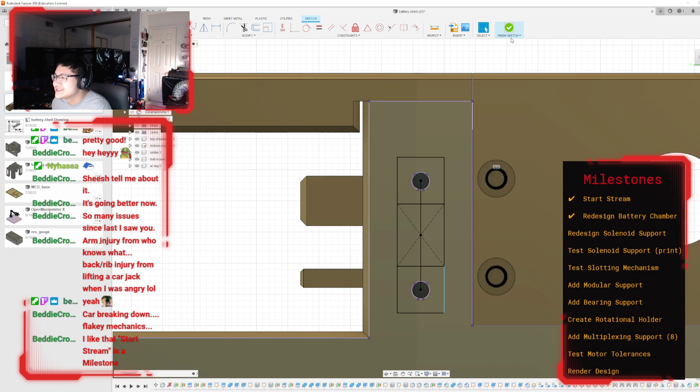I like that Start Stream is a milestone. I also agree. I realistically just have it there so that every time I make one of these charts, I don't have to copy paste the check mark, but it makes my life slightly easier when I complete a task. But yeah, I mean, at this point, I count it as a milestone. That made you feel good about accomplishing something. That too.

So I need to... theoretically, I can finish all this by Friday. That's my goal, anyways. All I have to do is, I made some redesigns to the chamber yesterday, in like around 1 hour, so that this thing is actually printable, because this is really badly CADed. I'm gonna be honest here.

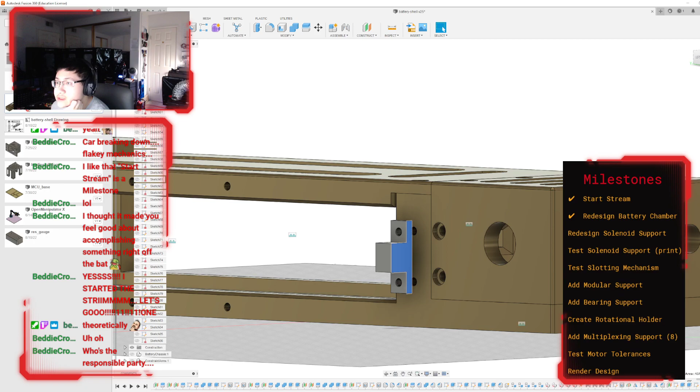And so that was that. This entire thing is due on Friday. So, no pressure there.

Yes, I started the stream. Let's go, that's me internally. Who's the responsible party? No pressure, buddy. No pressure, you got this. Oh, thank you. Thank you, Bella. And thank you, Betty. If you think you can, you can.

I'm still waiting on a bunch of things, actually. I can't deliver the Blinky Loaner kits until my stickers are here. It didn't say which Friday. It's this Friday, it's 3 days from now.

So I'm printing one of these cages off my printer right now on Belty. You'll do the heavy lifting for the most part.

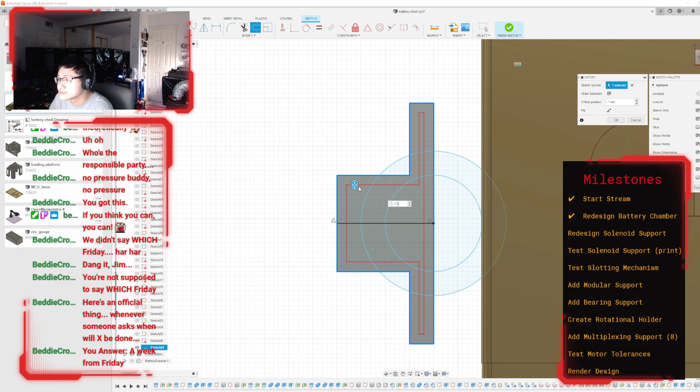This piece is mainly just to... well, let me explain what I'm doing first. So yesterday I went ahead and made this thing printable, which means redesigning the top part. I split the battery chamber into different components, like this top piece here, this bottom piece here, this little slotter piece in the middle. I made holes for it and everything. And also this little back piece was the hardest thing to print ever because of how it was designed. I don't know what happened. I tried to print it twice, and it just destroyed itself in Belty.

Here's the official thing: whenever someone asks when X will be done, you answer a week from Friday. That's official from people with millions of dollars. Seriously, you don't say which Friday though. I have a technical meeting with the people I'm supposed to turn this into, this Friday, so I really hope I have it done this Friday.

Okay, and then so I have this piece, which looks pretty funny. This piece is supposed to be a wire holder for the electronics that are eventually going to come from the other side, because this is supposed to hold a battery either while it's on the ground or if it's in the air. It's got to be slightly versatile.

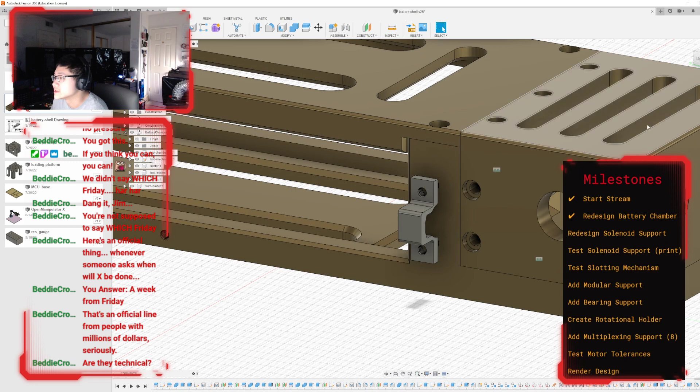So this piece is going to be pretty important. It locks onto the rest of the diagram right here, the rest of the model. That body there, this is going to be—there's 43 bodies already. Wire holder, you put it as a component. Let me just make another component here. Just call this external. Alright, so the wire holders are going to be... my organization in this file is actually kind of okay, considering some of my previous projects in the past.

Is there an easy way to select like the middle of this thing? Shift the key. Control. Control.

There you go. One dedicated wire holder coming right up, and then I just duplicate this on the other side.

Alright, so I'm going to go ahead and rotate this 180 degrees. Bring it all the way out here. Whoa!

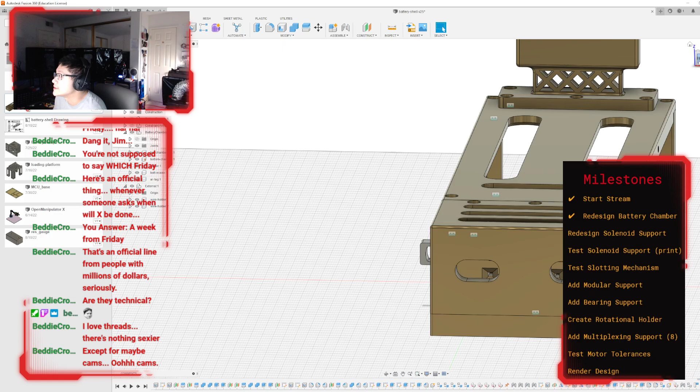Okay, just go ahead and joint it. Control. Oops, joint. Okay.

Alright, that was the easy part. Let me go ahead and get my constraint arms. I'm going to drag it into external as well.

Solenoid arm. Same for this one. I can go ahead and delete this component. Never mind, just put it as underscore.

Okay, so these solenoid arms are going to go in, attach themselves to the battery as well. Okay, now I have to actually make the actual solenoid piece.

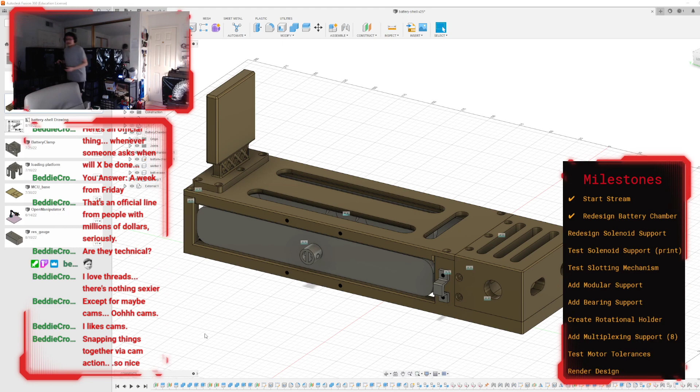So, I printed a bunch of these battery carriages, right? And then I printed this thing, which is really fragile. It's the slotter that's supposed to go at the end of this battery chamber.

So if you take one of these batteries and slot them into, pretend there's a big battery chamber here, and you slot it in like this, it goes all the way in, and it's very flush with the battery chamber. Like look, this is a nice fit. It's very...

Why did you make it so fragile? It's a prototype, Betty. You could probably break off these little nubs here and nubs here if you gave it no...

Nice, this is the wrong part. I'm gonna print this out of resin eventually, so it's not as fragile, but it works.

This is the end of it. This thing has screw holes on all four sides of it. Eventually I'm gonna coat it with Bellum's conductive glue paint thing, and it's going to slide right in.

So now the difficult part is just getting the contacts to work. I think it's to the point where it's a good contact, I just need to test it. But it goes right in, it's a very nice fit.

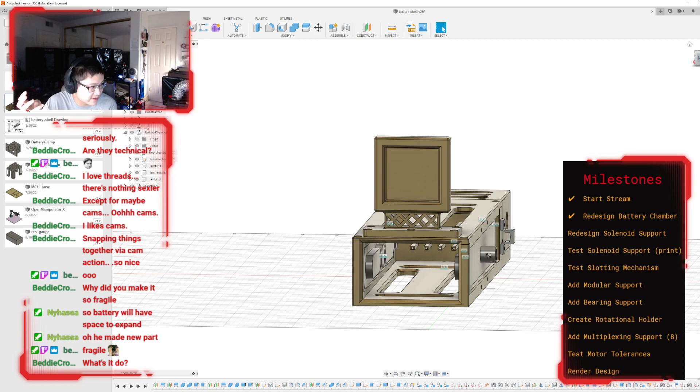And so when it swaps out the batteries, which is my department, what I'm doing, it'll need to be removed from the drone using a robotic arm, and then it needs to be placed in a compartment that can identify its voltage, charge, lifespan, whatever.

And so this is going to be the compartment. The battery will go into here, which the battery is going to be this thing. So the battery slides in, it locks itself into the back part, which is the slotter.

There's a bunch of electronics here that go ahead and map the XT60 and JST connectors with two main power and data lines. And basically these two arms come in here and lock into place, so they lock into the battery's internal parts, preventing it from moving using a solenoid.

And that's what I'm supposed to be designing right now, is the solenoid that clamps into this thing. And then this is supposed to be holding the wire that goes from the solenoid into the electronic compartment that acts as kind of like the control for whether to release or hold the battery in place.

Even better, in-flight hot swap battery exchange. I think one of the teams, at least in Cal Poly, not in my project, but they are trying to attempt to do that. So I think it's pretty interesting to see what they're going to do.

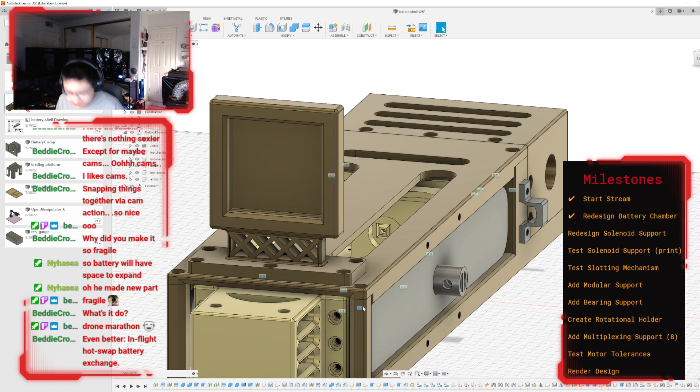Hot swapping power in the air is hard, though. But yeah, that's what my job is, basically.

So, in reality, I've already designed one of these pieces, which is this thing here. Specialized battery drone. Yeah, pretty much.

Make them work like flies mating. Those are some pretty large flies, Beddie.

Back when I made this little part, I measured how long this was supposed to be. Apparently 45 millimeters, and I'm not sure if this is too far in or not, which is why this part has to be extensively tested as part of the solenoid attachment.

I have this attached on 4 corners, but depending on its applications, it may have to double as the attachment to the drone. But in this case, I only wanted to contain a solenoid that locks it in the center and allows it to be a pushing arm.

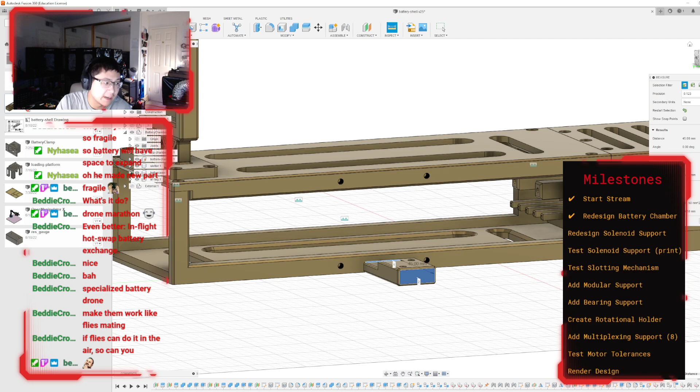So I'm using these solenoids here. These are basic 12 volt, 5 volt solenoids that push and pull. Theoretically, this arm is in the center, and theoretically all I need to do is make sure it prints this at the correct size so I can lock it into place.

The idea is that I can just push it into position, and maybe it'll be a press fit, or I can hot glue it in if possible.

But my original design of having 2 holes in the bottom is really a bad idea, because these holes are not standardized. They're randomly placed. So I created this little test platform and realized that if I went ahead and screwed this in...

Question, teacher: why a robotic arm to deal with the battery?

Good question. The robotic arm is not just for the battery. Because this is a whole ground station that the drone is landing on, the robotic arm is supposed to do other tasks, like repair on the drone, maybe swapping out a compartment or two. I think mainly the repair part, because if it was just a battery, there could be a rotating chamber for it.

The robotic arm is supposed to be multi-purpose, so not just for replacing the battery, but also replacing drone parts if needed, swapping out, say, a transmitter for another transmitter, something like that. Robotic arms are not my department, so I don't know clearly what's going on with them, but in general, that's why.

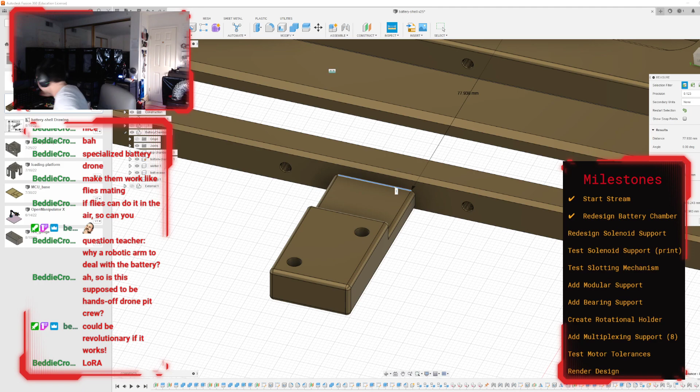LoRa, I don't get that reference. Yah, they got the fuel guy in racing. Sounds like that boat robot. He comes out with a big jug and funnel.

I see. So the idea here is to create an offset plane first, 5 millimeters away. The idea is that I'm going to use these 4 central junction points in order to create an attachment for the solenoid itself, and then find a way to clamp it in place.

So projecting this and projecting this, and then just creating a big old square. So theoretically, the central point of all this is going to be in here.

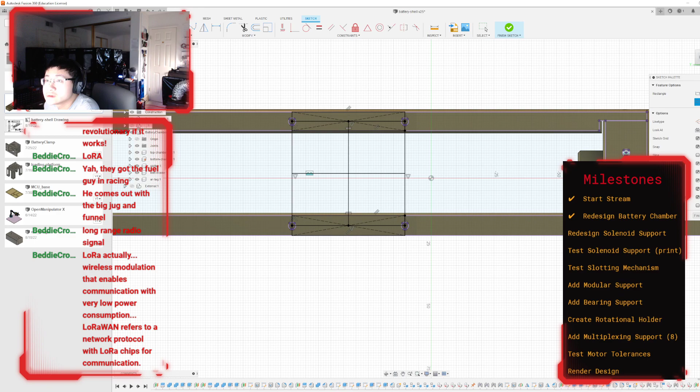With, let's say, the screws... Well, the screws need at least 7.5 millimeters, or else they're not going to screw in correctly. Let's go ahead and make that then.

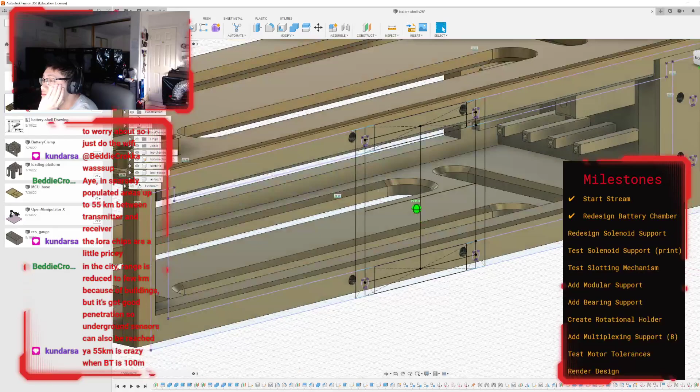Why is the bottom 8 millimeters? What happened to like 7.5? Alright, sure. Okay. So, theoretically, right?

I'm gonna give this a good base first, and I'm gonna start cutting things out. Don't want a repeat of the battery chamber. I'll give it a good base of like 5mm, just so that if I screw something in, it's gonna be very nice and secure.

And I'm gonna go ahead and stretch this out some more.

In sparsely populated areas, up to 55 kilometers between transmitter and receiver, but the equipment is a little pricey, and the city range is reduced to a few kilometers because of buildings, but it's got good penetration. Underground sensors can also be reached. 55 kilometers compared to Bluetooth's 100 meters. Bluetooth has no penetration. There is a public LoRaWAN network, but my area has no bridges or demand. Interesting. I gotta do some more research onto this later on.

Alright, so I'm gonna go ahead and extrude everything here in the middle. Maybe not like that.

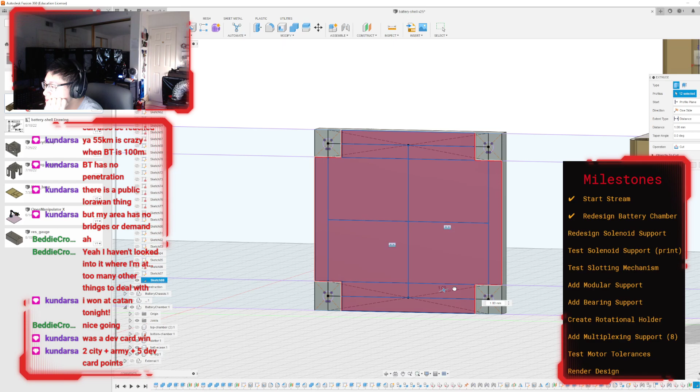Okay, I just have to decide on how big to extrude this thing, because I know it is supposed to be...

Okay, I think I have an idea. So I'm going to extrude this, I think this distance was like 45 millimeters back. I think, but it's not going to be like this huge monstrosity or whatever this thing is. Looks like a funny shape. So this thing was... Like, this measurement has to be really precise. It's 45 millimeters, okay, from front to back.

Okay. Cursed CAD. Make it huge. No Bellum? Bellum's somewhere. He was here, but I think I scared him away, I think. I love some cursed CAD.

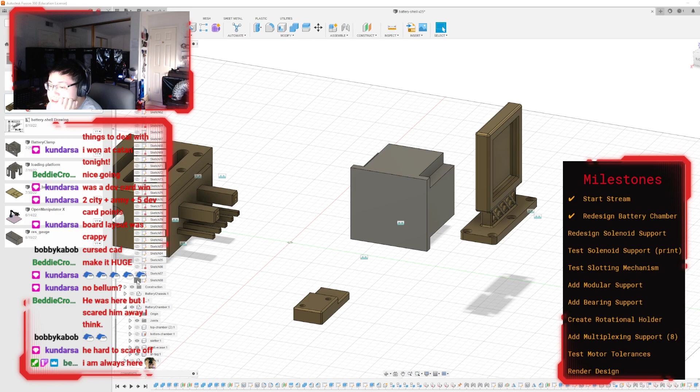Okay, I think I can go ahead and get rid of the middle part. It's really close to the back. I think I should extrude it 50 instead, just so I can get the measurement exactly correct.

Okay, you know what? I'm gonna make a new one. On my list of oddly shaped shapes, this is on my list of shapes that are oddly shaped. This is definitely a shape and a half.

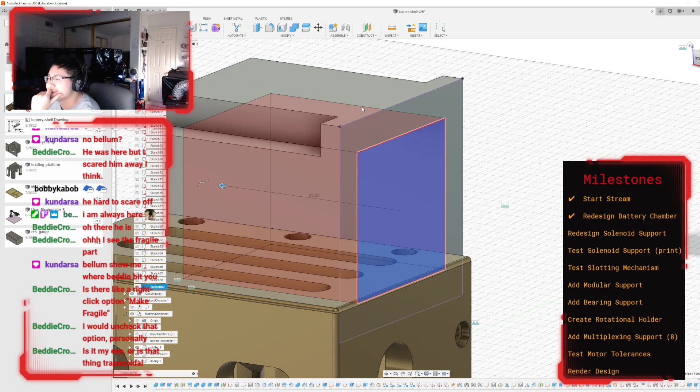What am I doing? What was my plan going into this? Hold on, I think I'm getting confused. What was my plan? Did I even have a plan?

Right, it was like this. That was the screw holes. I think it needs a little bit of this action here. Missing 2 lines.

Okay, and then I probably can go ahead and execute this portion of it now. Maybe. Sure. Sure, I'll go with that. Okay.

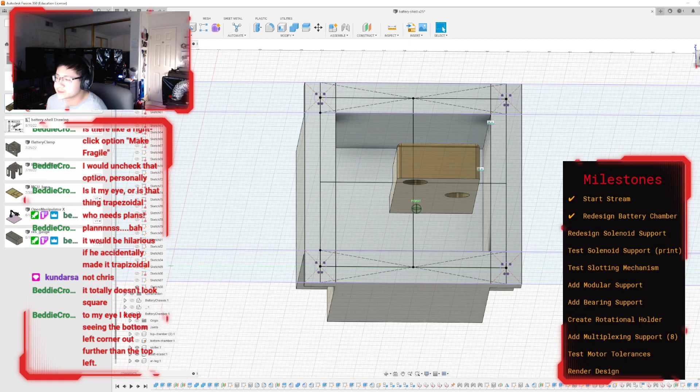This being supposed to be a robust solenoid holder, it's not looking like it. My chances of making one are not great at the moment. What do I have? I have a way to attach this thing to the side of the chamber. I have holes. I can make holes, I think. I can make holes. Yes.

Okay, let's see if I can memorize the M3 screw orientation. What's my M3 screw settings here? Not selected. What? Okay, M3 screw settings. It's going to be a counterbore, simple, flat screw. It's going to go 5 millimeters deep. Top is 6. Side is 2, and then this is 3.5. Okay, screw complete.

Well, that's interesting. Okay, hold on, let me get this straight first. This solenoid is not going to directly fit in the back, right? There's going to be some sort of tolerance to prevent this from happening, right? Maybe. What's the size of this thing? It is. Tolerance has to be pretty exact here. I'm gonna go 23 millimeters.

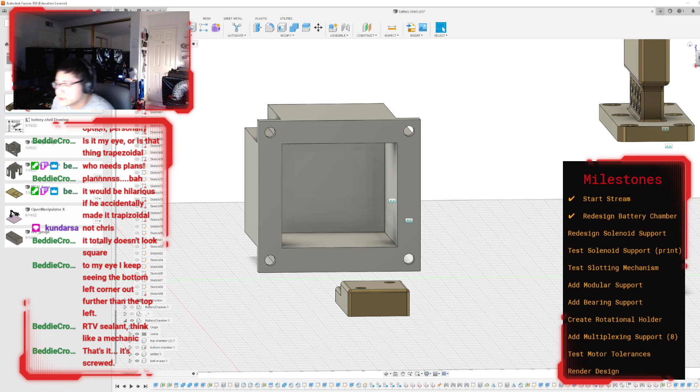Okay, so find the center first. Okay, and then from the center, horizontally I have 23 millimeters. Don't know if that's even the right number. I don't know the PLA to aluminum tolerances.

Is there a right-click option to make fragile? Is it my eye, or is that thing trapezoidal? Uh, totally doesn't look square.

All right. Thanks for being here, Beddie. It was great seeing you again. I'll catch you next time when you decide to visit the channel. See you then.

Funny comments though. So it's 23 horizontally. I mean vertically. And then horizontally it's going to be...

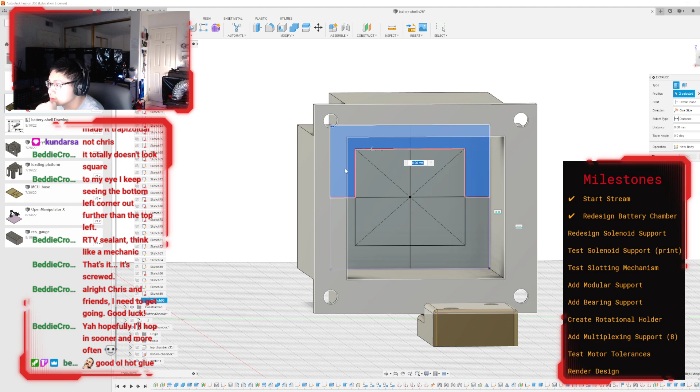Yeah, I'm legitimately thinking of just doing this. No, not 45. Not all the way. It'd be like half the way. How long is this thing, anyways? If I put this in, 25.

So, to enclose this entire thing, I have to extrude at 25. And then theoretically, the entire solenoid is able to fit in the middle. Let me just blow a big hole in the back. Make a large circle—this is gonna be for the back area, the wires and stuff.

So the back plunger part is gonna be, say 7.5—I'll be generous. And then I need a bottom hemisphere thingy for the wire.

Okay, so theoretically that should be able to hold the solenoid together. Maybe.

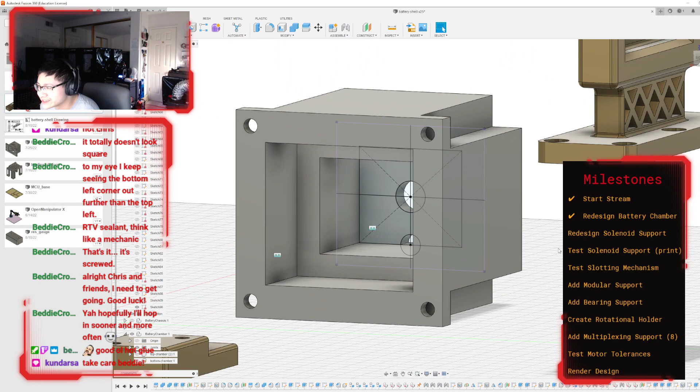So I'm going to put the solenoid in, and then maybe I make a solenoid cover? I don't even know if that's a thing.

Yeah, take care, Beddie.

Maybe I make something to hold the solenoid in place rather than extruding it out. So is this thing really 25 millimeters? 25 is like the bare minimum.

I think it's more or less like 26, maybe 26. I know the tolerances for aluminum on PLA is a little bit different than PLA on PLA, but I don't know if it's like a millimeter difference. I think it is. It's wild.

So the solenoid goes in the middle here. Why are these two separate bodies? What? Okay, now it's not anymore. Okay.

So what I'm gonna do is first I'm gonna go ahead and start holing out this area.

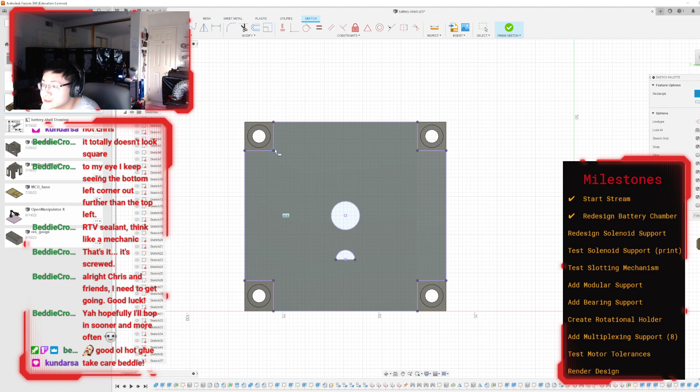I spoke too soon, that's gonna leave a mark. They are only slightly unnecessary. I changed my mind—they are only slightly unnecessary. Alright, they are unnecessary up to that mark, which is supposed to be 30 millimeters. You know what? Redo.

Theoretically, if I extrude this up like 25... oh, and now it looks even weirder. Oh, congratulations, me. I have made a solenoid cake.

If I put in my X-ray vision, you can see it overlaps here. It's not completely out of hand. Completely. Okay, I wonder what other things I can take apart.

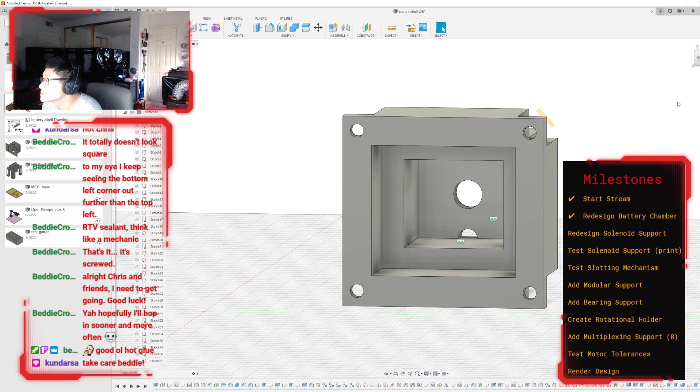Okay, so if I want to plane at an angle, I'm going to create a plane at an angle so that I can mirror this eventually. Like 45 degrees here. Nah, it has to be 45 degrees in the center, which means on the central axis through this thing.

And then I'm going to need a plane through this thing—a 45-degree angle and a negative 45-degree angle. Great, now I can mirror things because this is symmetrical.

Okay, so what I'm going to do is I'm going to start holing this out. My printer is going to absolutely hate me for this, but I don't care.

So I'm going to go ahead and project this plane, and all I'm going to do is a little offset action here. Like 3. Like 4. 5. Maybe like 2.5. Nah, 3 was better. 0.5 was better.

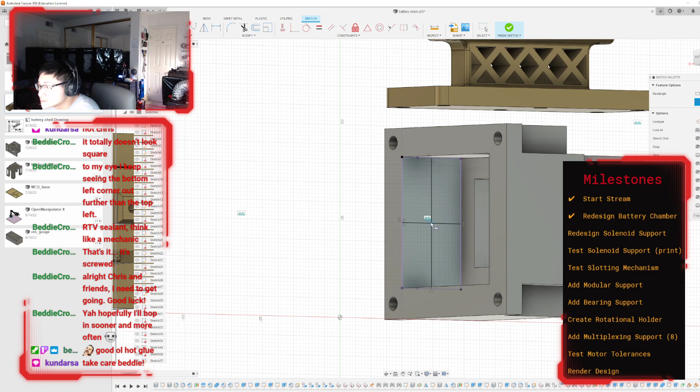Something like this would work. Yeah.

It's too close to the edge, though. The ratio's off. Okay, that's slightly better. Alright, I just mirror this thing.

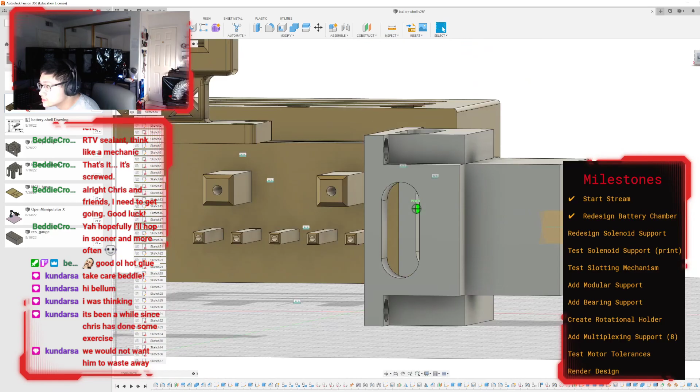Cool, and then I just mirror this thing again. Double cool. Okay, first part's done. Taking that big chunk out should hopefully help with the printing process.

Okay, I wonder what's the gap in that. 5.75—that's enough for an M2.5 screw, I think. So if I put a screw in that to hold the solenoid together, that would work.

Okay, I'm gonna leave that back portion alone. I'm gonna start filleting things. Fillets. So many edges to fillet.

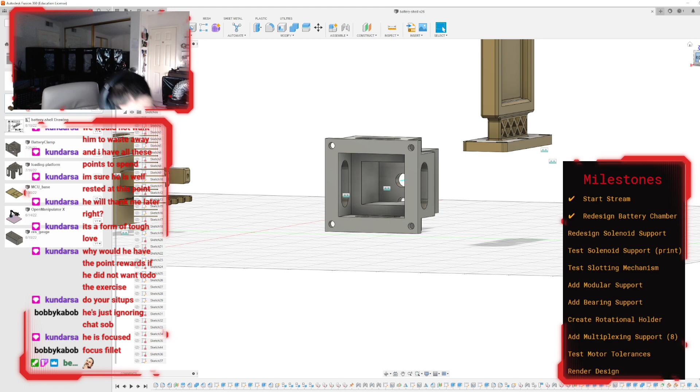Hi Bellum. It's been a while since Chris did some exercise, we don't want to waste away. Save my work first so I can save this abomination of a solenoid structure. And then Bobby redeemed do 3 sit-ups. Why would he have the point rewards if he didn't want to do the exercise? Do your sit-up, he's just ignoring chat. I was ignoring, well I kind of was ignoring. Not on purpose!

It's been so long since I streamed, I completely forgot that I had to look at chat. Alright, focus fillet, I'm gonna do my sit-ups.

Please hold. By the way, I didn't do an unboxing on stream, but I want to show you guys this. I finally got my parts from JLC PCB, and they didn't send me real resistors, but they sent me a box of about 5,000 resistors. And these are all resistors. There's so many resistors here, it's unbelievable.

I have a reel for you. Oh yeah Prinars, I still need to trade with you, still need to get that stuff.

Also, their parts are really high quality compared to the ones I bought from Amazon. Like these are the dial potentiometers I got, they're all nicely put in these rail thingies, not all clumped together in an ESD bag. They're really high quality parts. I mean, I did pay like $300 for shipping for them, but still, they're quality parts. I will save them for later.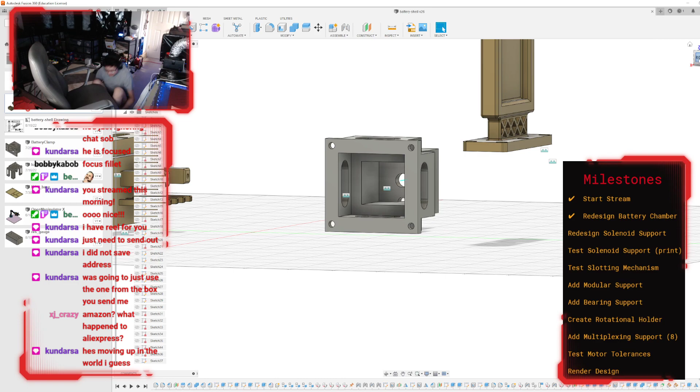Alright, 3 sit-ups, here we go. I just felt my back snap in half lying down. I've been sitting at my desk the entire day. Here we go. 1, 2, 3. Oh, I'm very out of shape.

I'll do a reel for each of these. I don't have the address, was going to just use the one from the box you sent me. I remember he used these steps with his legs flat. Yes I did. Amazon, what happened to AliExpress? No, that was from JLC PCB, from the actual PCB manufacturing company themselves, they sent me a box.

Moving up in the world. I can't send the box because my sticker manufacturer still hasn't given me the stickers for the box itself, so I've been waiting for those stickers for like a week. My sticker manufacturer is a high school, so I can't blame them much. You can just use the address on the box I sent you because I have your address. I did not keep it. It's okay, I'll send it to you eventually. Same for Bellum, and wherever Positron is, I also have a kit for him. Things have been going along here, Nyhasea's been doing great work sorting them out for me.

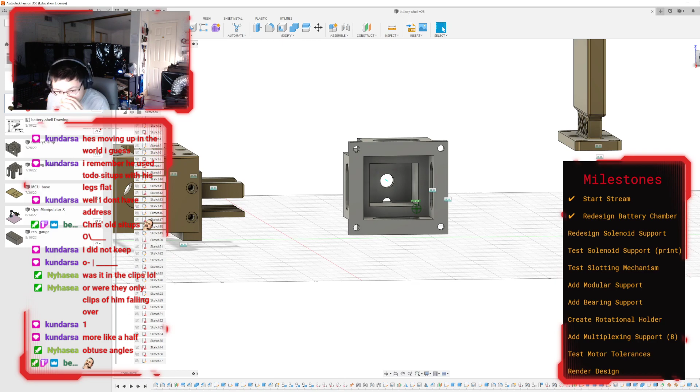You know what? Because of how this is locked onto the chamber, I'm going to completely remove these sides. It's gonna look weird, I know, but from this angle you can see everything that's happening, and I think that matters more. So from this point I can just go ahead and fillet the rest. I think I'm going to apply a heavy chamfer on the top instead of fillet.

Now, want to tell the stream how I've been making you sort all of my electronic components? I've been putting Nyhasea to work.

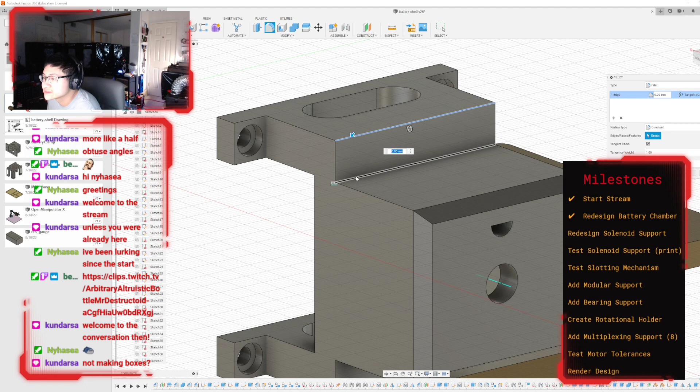Episode number 2 of my questionable designs. I'm gonna be honest here, these designs are questionable. Look at all those curves though. Line on the top, bottom, left, right.

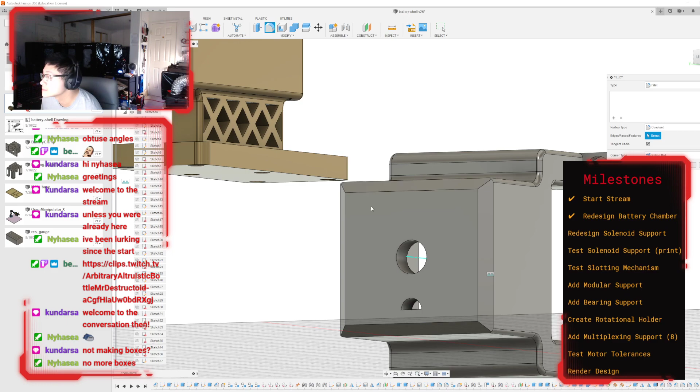Oh yeah, then I gotta fillet this edge. Okay, hold on. I gotta do this for all 4. No... Okay, there. Should I fillet those sides? I'll fillet those sides. So many sides to this thing.

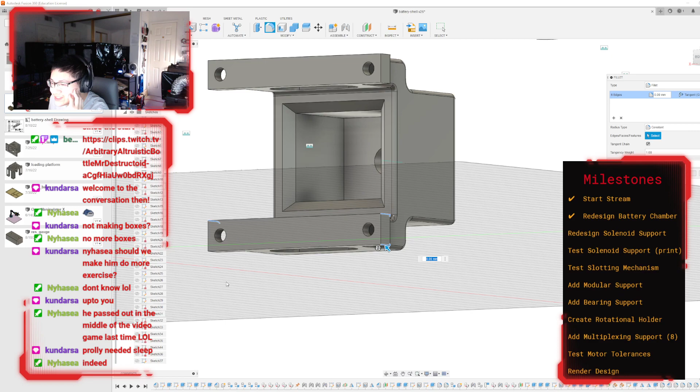Not making boxes, no more boxes. And Nyhasea sorts my stuff now, and fixes my printers. Should we do an exercise? You passed out in the middle of a video game last time. Even though I'm technically on vacation now, I think I still need sleep. Probably.

Okay, that looks a little better. You know what? I'm going to print this and see if it actually fits. Oh! Almost forgot. This chain I'm going to delete. I'm going to make a piece here.

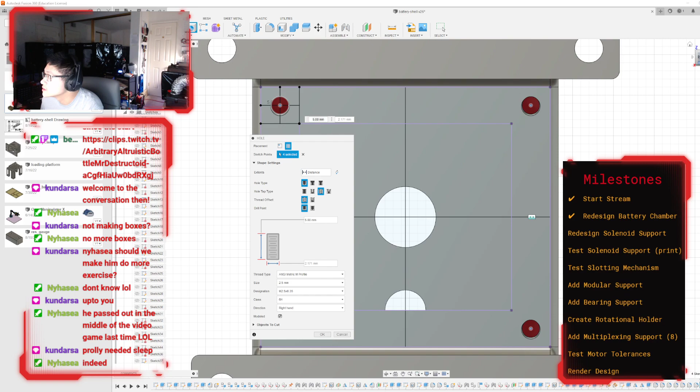Oops. I'm going to use my favorite screw of all time, the M2.5 by 6 millimeter screw. I think this will actually fit. Maybe like 3.

Okay, so I'm going to make an offset plane here. I'm going to make a little case for this. I think that's actually good enough. So it's going to be a little flat plane, maybe like 3 millimeters thick.

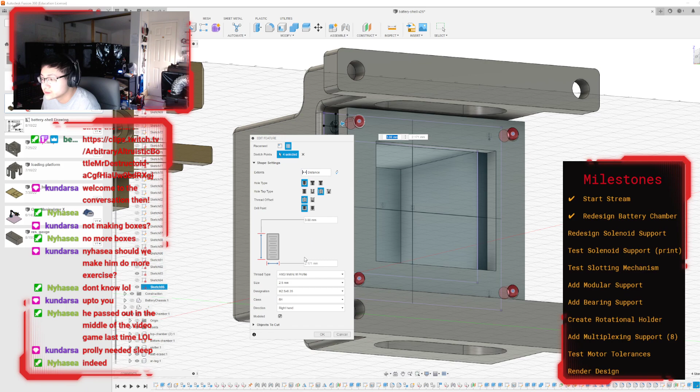And then it's going to have holes, all the way through. I'm going to make them less lazy holes because I don't want to be destroyed for doing this. For M2.5 by 6, I think it's just 3 millimeters. I don't know the tolerance off the top of my head, but I think it's just 3 millimeters.

So this is going to be like a top cover that's going to go on top of the, well, obviously. It's gonna go on top of the solenoid just to lock it in place. And I think this is a slightly better way of doing it than using hot glue.

I forgot to do the bottom one. Just deselect this.

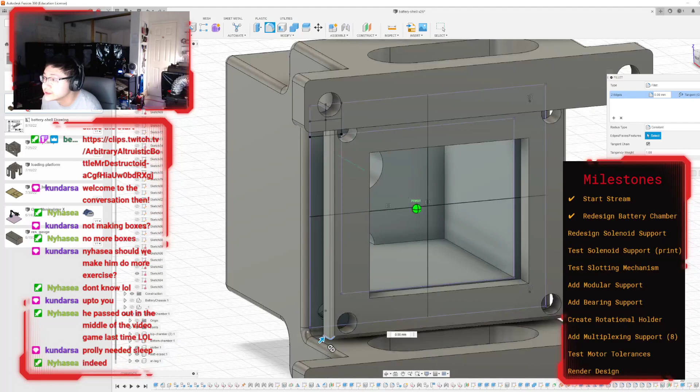Yeah, so hot glue is good, but you know what's better than hot glue? Screws. I'm gonna have another screws and tolerances workshop next semester. It's gonna be glorious.

Okay, nice little holder for the solenoid. Let me just make these into components and then clamp them in place. And then I just have to go ahead and print these out and test them to make sure they're okay.

Well, this technically goes in external, but I'm going to make a new component. I'm just going to call it solenoid stuff. I'm going to put both the solenoid holder and solenoid cap inside solenoid stuff. I'm going to put solenoid stuff inside external.

Okay, so then I'm going to go ahead and constrain some things, joint some things. Join that. Just get out of here for a second. Of course, it's going to throw it down all the way down there.

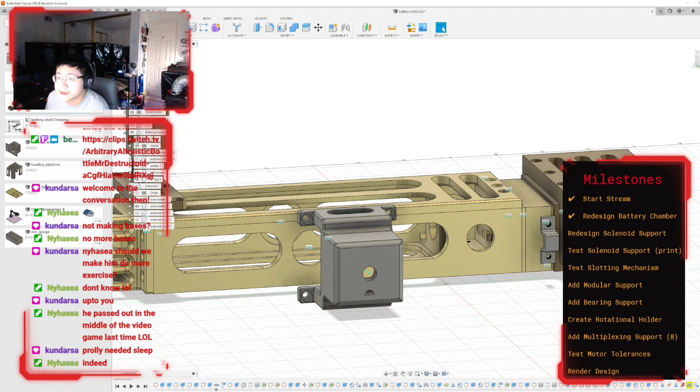Okay, and then I'm going to joint this thing to... not that. This. Chamber. There you go. What was I jointing? What is this? Oh. Joint.

Okay, so that's the solenoid holder. It's literally going to be positioned on the outside of it. And then I just need to go ahead and copy this to the other side. So copy paste solenoid stuff. Move it, rotate 180 degrees. Okay.

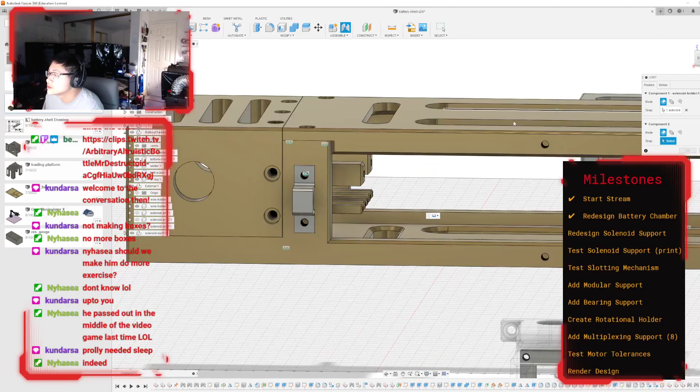And then joint it to battery holder. Hey, it's a pretty good fit. Okay. Hold on, it's upside down.

I want to join it to the bottom instead. So, the bottom there. Cool.

So I think that'll do it for the solenoid holder. Now theoretically, if I get this exactly correct, then the solenoid will be dead center to the clamp thingy, the solenoid arm, and then it'll be able to attach itself in place very neatly. However, if I got any part of this tolerance incorrect, this is not going to work. So, just no pressure, no pressure.

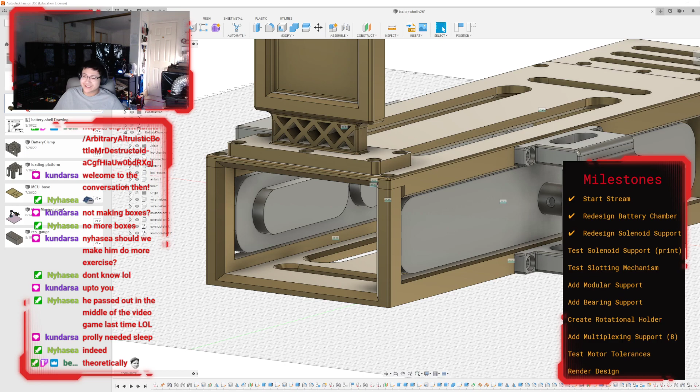Hold on, stream goals, text. I can finally check off redesigned solenoid support. Okay, that's 3 check marks. That's just 3 check marks in, what, 2 days? Okay.

So, solenoid support is in. The holder thing is in. What's next? Wheels.

Wheels. Okay, because this is going to be part of a rotational battery chamber, I'm going to have to find a way to attach some wheels to this. Now, luckily for me, I've already had a lot of experience with wheels in my Hyperloop project, so I'm literally just going to steal all the tolerances from that project and put it here.

I remember when I spent 2 weeks on this during the winter. Best 2 weeks of time spent on stream, honestly. This thing.

This is an amazing project. I still need to redesign some of this stuff. Instead of rubber bands on the wheels, I'm gonna make them out of TPU. But this was a fun project to CAD up.

What I'm looking for is the ball bearing, so the tolerances on this part of it. I'm going to redesign this a little bit. If you remember the fork design for the double wheels, this fork was interesting to CAD.

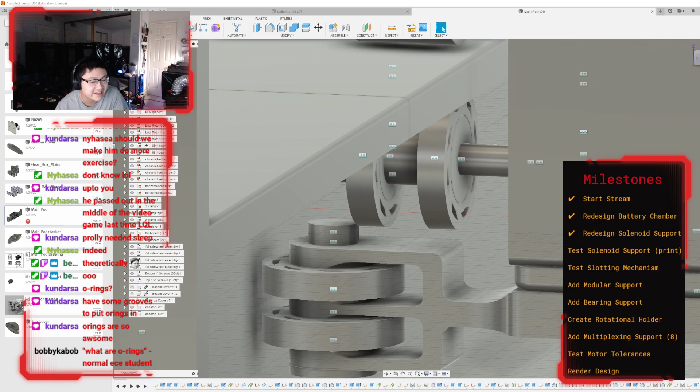What are O-rings? Google this. O-rings are like rubber clear O-rings. Interesting. It's a seal. I don't know, I've never worked with this before. O-rings are the backbone of all hydraulic gas systems. I mean, I've seen this before, but I don't know what they're called. All right.

This is everything here, literally press fit together, which is awesome but also kind of scary. Anyways, okay, back to this.

Cursed CAD from ECE, exactly. This is, you don't do things professionally, you just do things for the memes. I mean, in that it turns into things that are done professionally. Also, lesson number 2, you do things out of spite. Spite wins.

Welcome to the world of things that should work, but things that shouldn't work, but they do anyways. Oh, look at this tolerance. Oh, that's not gonna work. Huh.

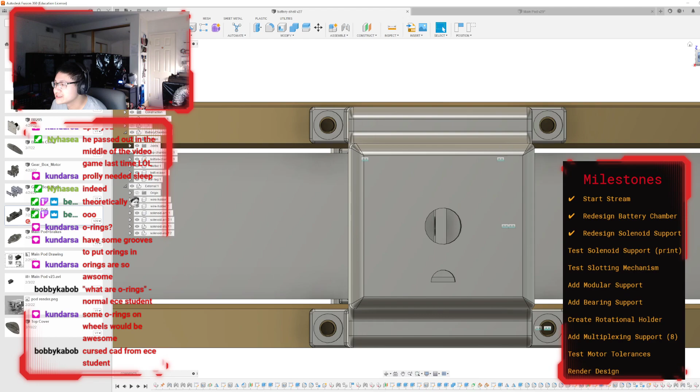You know what? I'll put this in, fine. Yeah, this offset is totally not gonna destroy all my hopes and dreams, right? Let's look on the other side. It's also offset.

Okay. You do things for the memes, just put that on every poster you do in the future, and I will. Don't you worry, I definitely will.

Okay, so now we have to deal with the other two sides of this battery chamber: the bottom for the wheels and the top for the attachment to the drone. Oh god.

Okay, how did I sketch this out? Or how did I imagine this? Get an O-ring kit from Harbor Freight and put them on the wheels. Please, I will give bits to see this. Okay, I will. I have to do a lot of upgrades to the Hyperloop thing anyways, so eventually we'll have to do so.

Hey, Maggie. Hello there.

Okay, wheel phase. I call this quote-unquote modular support. Okay, so what do I need to do? I need to steal the wheels from Hyperloop. Steal the wheels, steal the bearing sizes. Yeah.

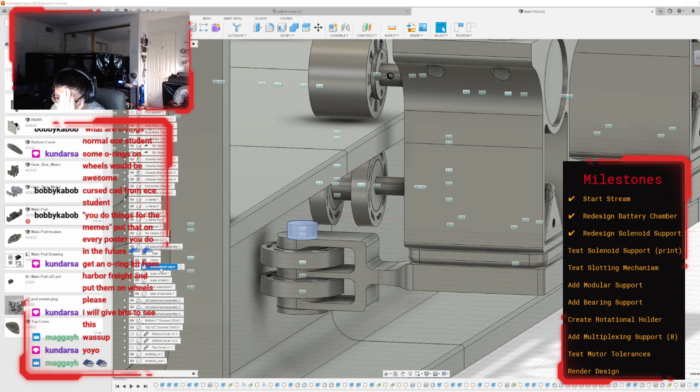So these wheels are going on a bearing, which go onto this central axle here. Oh god, this thing is a hot mess. It's because each support wheel comes with a bearing model and also the support wheel itself.

Oh god, okay, side wheel axle. And then I need the side wheel cap. Yeah, using these three pieces I can rule the world.

Haha! I still remember I used to use 3D printed spacers because I didn't want to use the metal ones. Hey, I mean, I've got a bunch of 3D print parts, I might as well use it, right? I mean, it worked, I guess.

I'm telling you, like 90% of my final ECE project is going to be CAD, and not actually ECE stuff. I have to do senior project next semester, I think. Maybe.

Okay. Wheels. Ah, my goodness.

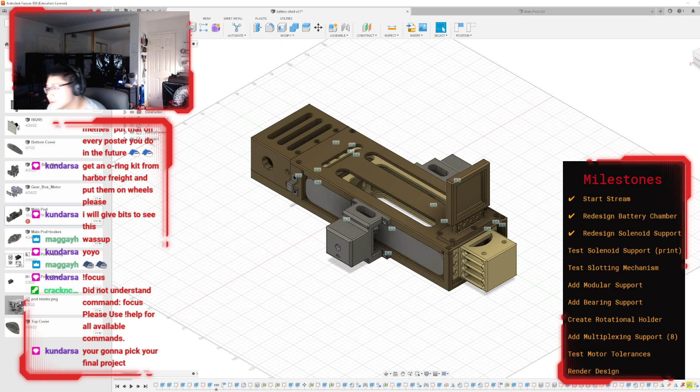Okay, let's see how many versions I can rank this up to. Okay, so we have the battery chamber, we have the combined arms, we have the solenoid thingies, we have the back thing for the PCB component. I still have to design the PCB for this.

I have this thing for the wires. I need stuff for the bottom. It's gonna give me a massive headache. Okay, so...

Let me just Microsoft Paint what I'm gonna do, because I think that's gonna be a better way of drawing out what I want. And I'm pretty sure my tablet is not working, so I'm gonna draw this with a mouse. Okay, this is gonna make zero sense.

So let's say this is the battery chamber, right, battery stuff. There's gonna be a wheel down here that kind of looks like this, let's draw that again. So this is gonna be the bearing, and this thing will turn, right? And then attached to the bottom is going to be a long pole that is attached to, maybe like inwards, 2 more wheels at the bottom.

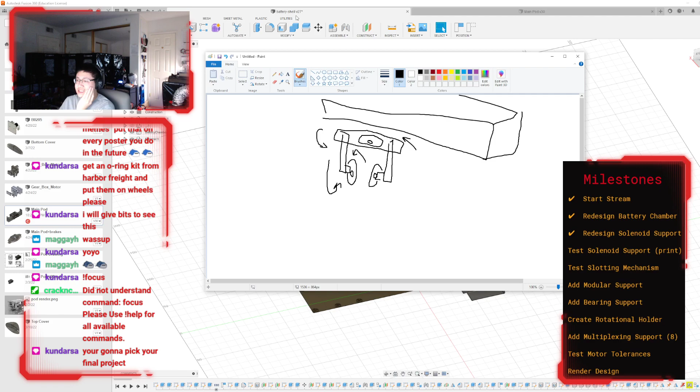There's going to be basically 2 of these inside the model. So you're going to have rotation in the XY direction, and then rotation in the YZ direction. So then it's basically like those office wheels where you can turn in any direction possible. And everything is guided by a center beam that attaches to a central motor, which turns everything in the XZ direction, so that the differential between the larger motor and the smaller piece turning will even out. Does that kind of make sense?

I'm going to go ahead and have this copied and pasted here on the front too. So the front's gonna have a wheel thingy, the back's gonna have a wheel thingy, the whole world's gonna love it. Right?

And then it's all gonna be rested on 2 circular platforms, in which the battery is going to be inserted through here.

Art. Hey, this is mouse art. The best mouse art you've ever seen. Is my camera in focus? I feel like it is. Maybe it's just my glasses. It is my glasses. It's too late in the day for this.

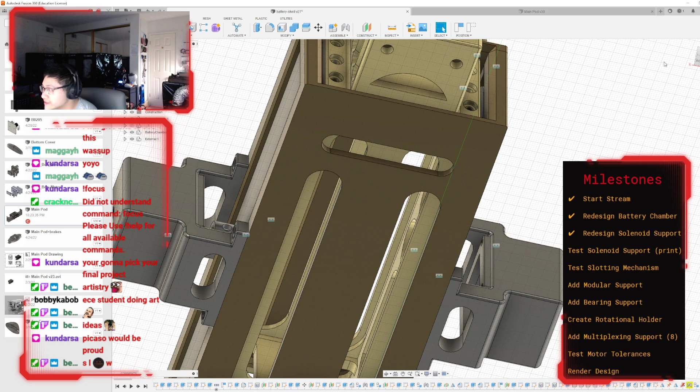Okay, so I need 2 sets of wheels, pretty much. One set is going to be on the front, and one set's going to be on the back. It'd be real nice if I could use this piece right here to do the wheels, but unfortunately I can't because some dude decided it would be a great idea to make that hollow, but it's okay.

No hard feelings. Okay, first thing, counter position. First things first, draw a rectangle. That is a nice size. Sure.

Second thing, find the midpoint between these two areas, because apparently they're the most distinctive features in the entire chamber, which is those.

Okay, I forgot to make an offset plane for this. Frick. Okay, this is why you make offset planes, so that you don't run into issues later on.

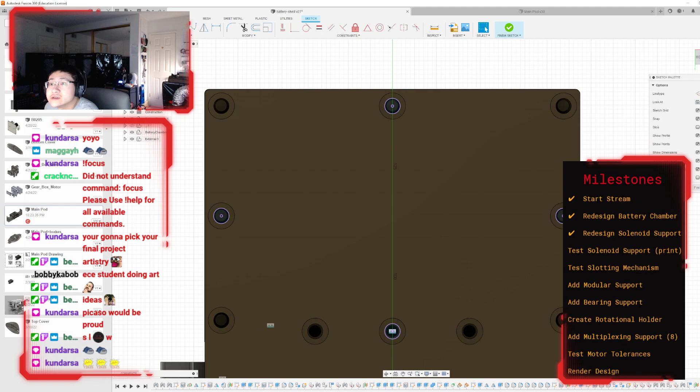Okay, wheel stuff, real wheel stuff. Okay, I'm going to be smart about this and only project these 4 points. And then I'm going to make a point in the center of those 4 points.

Oh, gotta love Fusion telling you what's wrong. Save my work. Yes, thank you. We're on version 28 of this battery shell thing. I have poured hours into this.

Unaccountable hours. Okay, so what would be the best way to attach a giant wheel structure to this platform? Oh, I know, how about making this like a 5-pointed thing? We can use 5 screws. Hot glue. So many hours for it to be fragile. Exactly, exactly. You hit the nail on the head. Or you hit the battery on the head.

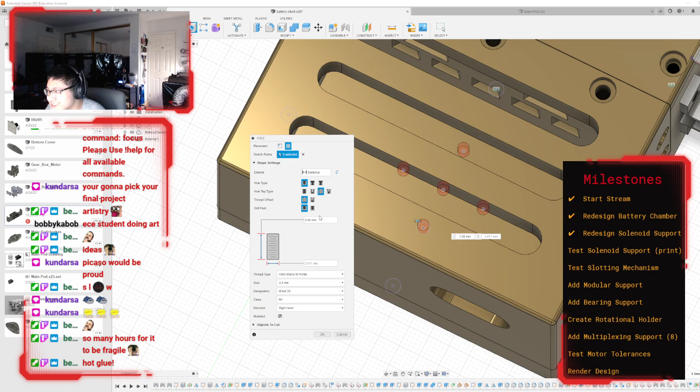How deep is this thing? Can I make it 5? No, I cannot make it 5. Okay.

Big bad screws incoming. So now I can make an offset plane. My goodness. Go to my sketch, find this sketch. Project these things.

I realize that I'll need to reprint one of these battery chambers in order to get this correct, but I don't care. I also need to color those pieces. I realize that color makes a huge difference in what you make. Makes it just a slightly more tolerable, you know.

It has to be 7.5 for a 20.

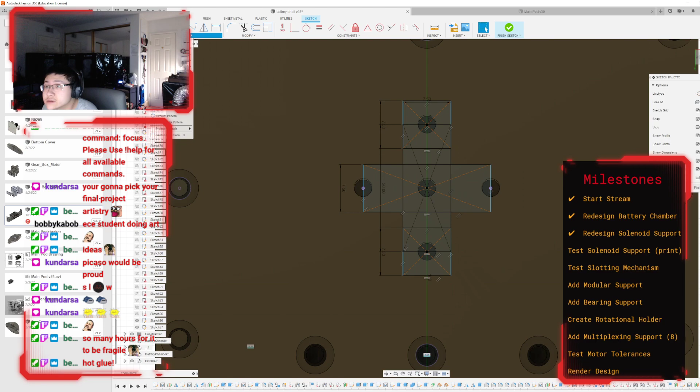Center rectangle. .5. That was not right.

I don't know how I used to be able to do long haul CADing streams back then. This is hard. I'm losing my focus after just 1 hour. Maybe I'm getting soft.

Okay. Big boy piece right here. So if I need to make this screw an M3 countersunk, that's gonna be M3x6, and it's gonna be 2 millimeters deep. I have to extrude by 5.

Okay, and then on here, go ahead and project these points. Okay, finish the sketch, and then make my holes. It's gonna be countersunk, simple, flat.

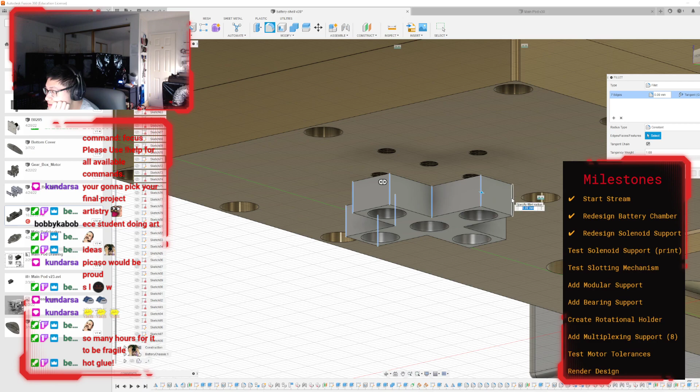Oh, this thing is never falling off. So many screws on this bad boy.

This is looking like that one level in Wii Play, or Wii Sports. Like one marble level. No, it was like the Wii Fit balance board. It was like one of the first levels in that game where you had to tilt to put the marbles inside the holes, and there was one that looked exactly like this. That one level, what was it called? It was Wii Fit marble game. You gotta find this. Marble Madness.

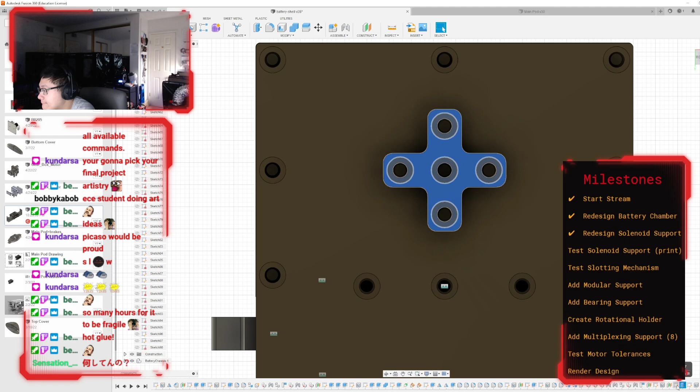All right, real fast here. Yeah, that center hole's not gonna work. Same for this one. Gonna make one in the center. Okay, and then the center is gonna be the rod that goes into the bearing.

Oh, this is gonna be a fun print. My printer's gonna hate me. Okay, so I'm gonna find the center of this thing by just projecting it.

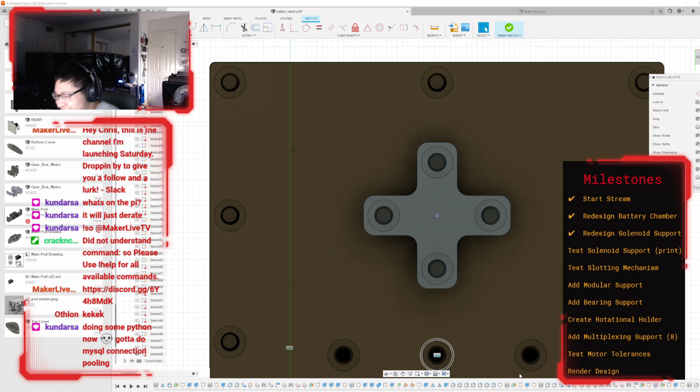The Pi is currently just running a desktop server. I have team members going on it and coding. I can show you. So luckily, I'm not doing this by myself, and I have team members that are actually coding this.

I think what's going on is RPi client. Yeah, so right now RPi client is running a script to retrieve the battery data from the station. It's hooked up to an Arduino Mega and onto the battery array I showed last time. And if you run this script, I think this is connected to a server right now. No, it's not.

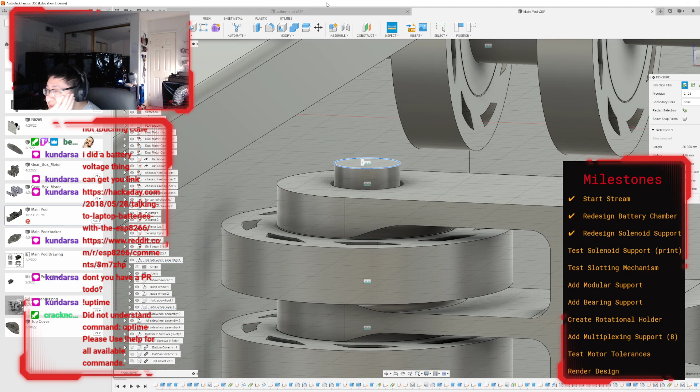Anyways, okay, time to steal some data from this project here. So the diameter of the cap of this thing is... why is it not in millimeters? The diameter of this thing is 8.04 millimeters. Right, I remember the time when I was intricately changing this. Literally this cylinder had to be 8.04 millimeters or else it wouldn't work for some reason. It was a crazy amount of precision that this thing had.

Alright, I'm just gonna use 15 millimeters. That's a good enough length. Maybe 20.

So the first one's gonna rotate in the XY direction to compensate for the error in the bigger motor that's connecting to the back of this. Speaking of which, I should probably put some screws in the back just so that it has something to connect onto. Maybe over here. That'd probably be a good idea.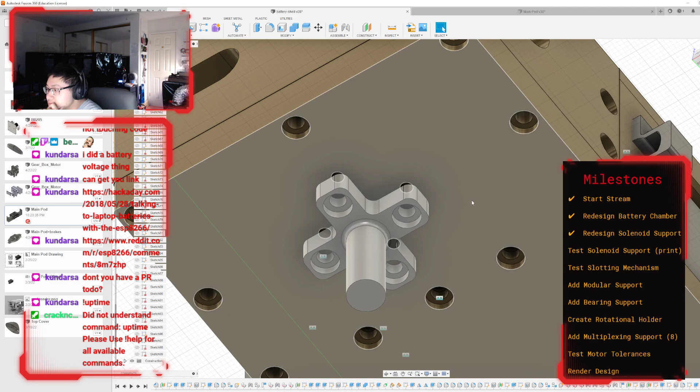Okay, yeah, this sticks out the bottom. Oh my goodness, what'd I do? Plastic. Oh. Okay, so this is gonna be it. And then I just import one of those wheel bearing thingamajigs into here.

Load support wheel. This thing, I don't feel like CADing this again. I'm just gonna reuse it from Hyperloop. Okay. Doink. Oh great, it's large.

The origin is also in a questionable location. Okay, wait, no, no, hold on. Wait, no. Okay, set pivot to a reasonable location. Check mark. Alright.

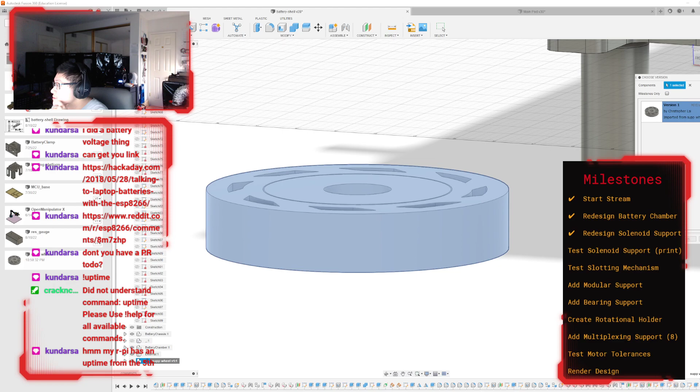So the bearings that I'm using have weirdly specific tolerances. So yeah, I'm just gonna drag this here and press OK. And I'm pretty sure this is gonna be a support wheel. Okay, it is. Break the link. What? What? Break link, okay. The bearing itself and the 3D print on top of it, this is like an exact tolerance for some reason.

Which is weird, which I'm fine with. That piece I'm gonna have to... wheel holder. I'm gonna turn into a component first. And I'm gonna make a new component just for this stuff called modular.

Okay, so I'm gonna joint this piece and this piece together. Put it like almost all the way up here. Like this piece doesn't matter whether it moves up or down because... it does matter whether it moves up or down. Just kidding.

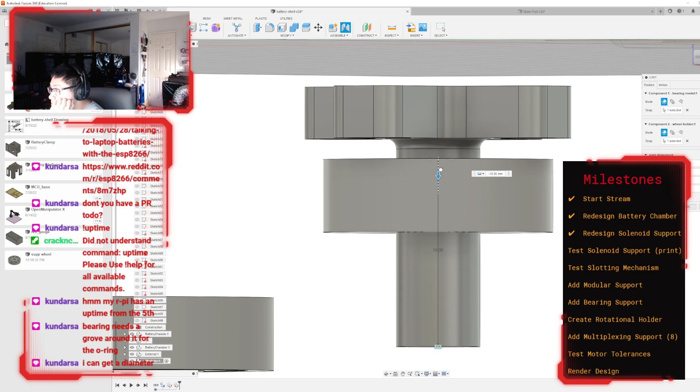Okay, I'm gonna shove it as far in as it'll go. It's like 19 millimeters before it bottoms out. Sure, because that fillet is actually pretty important. Wait, I thought this was... hold on, I thought this was a rigid body.

Okay, and then I'm going to put up 19. Oh yeah, okay, so theoretically this will turn. And then I need to fix that. Oh, there's so much stuff here.

So this extrusion, I need to push it back. Like 15 maybe. Maybe. Yeah, okay. That'll probably do it, to be honest.

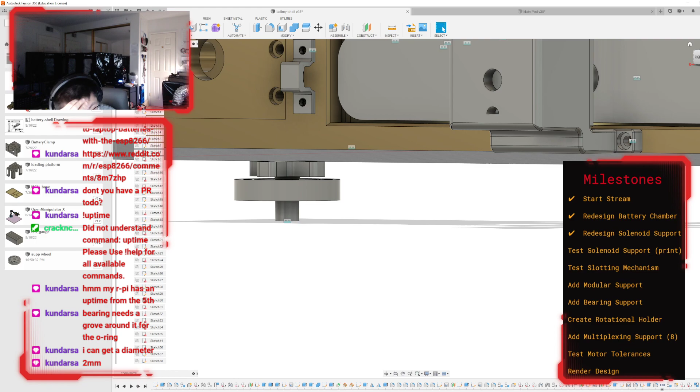And then I need to make a cap that I'll screw onto the bottom to prevent it from going down. So it'll have some springs. Bearings need a groove around it for the O-ring. The O-ring can get a diameter of 2 millimeters. Or I can just press fit it.

Because the bearing will directly go into the 3D print, which will directly go onto a TPU ring of around 2 millimeters, which will be the O-ring. I see, where you put the rubber? Yeah, I get it.

Make 2 or 3 grooves as a half circle, 2 millimeters. Hold on. And you see what this looks like on an actual bearing, because I can't visualize what you're telling me right now.

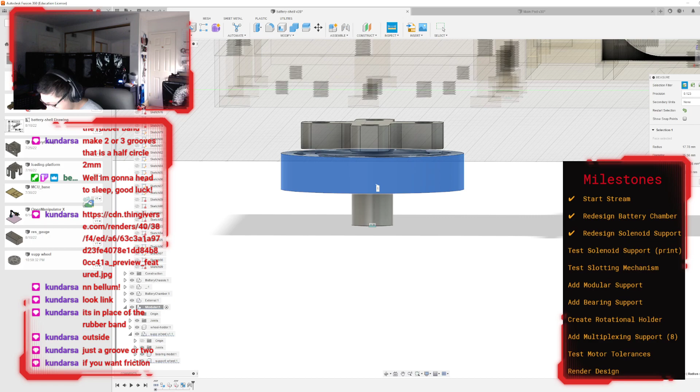Alright, so what's the diameter of this thing? Or the circumference? Diameter is 35.56 millimeters, which means 35.56 millimeters times pi is 111.715, which is the circumference.

So I construct a tangent plane on this wheel, and on the tangent plane, I project this object, and then I make a rectangle from the bottom of this all the way to the top with 111.715. Then that'll basically wrap around the entire thing when I do an emboss.

And then all I gotta do to make the things that can also show me in this picture, just a groove or two if you want friction. Yes, so then I'll have 2 millimeters, right? That's like half the wheel.

Okay, 2 millimeters thickness O-ring, I need to buy that too. And I just do an emboss. Do the faces. And then I'll have a...

What's the depth? Do you know? Is it just 1 millimeter? Half millimeter? Half circle?

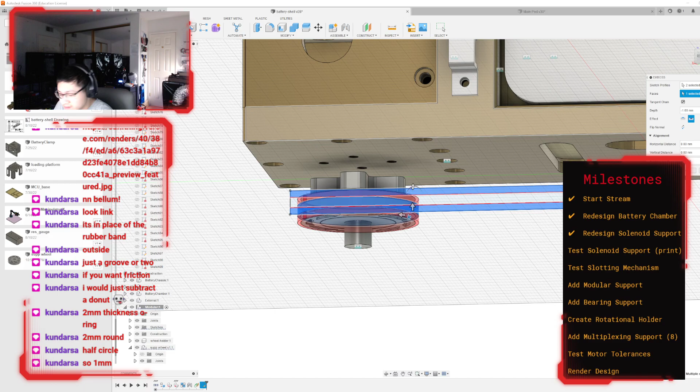Oh right, so like that cuts it. That cuts directly into my wheel, which is fine.

I think I need to make it slightly longer. Hold on, make this like 111.8 or something.

Why does it emboss like that? What is this? Why is this here? Can I like... Okay. Pretend that was never there.

And then based on this, I should be able to put an O-ring there, right? I would make a 2 millimeters donut on the wheel and subtract that, but that's an SCAD thing. I think I'm just gonna go ahead and... I don't know why I didn't emboss it correctly. Maybe I need like...

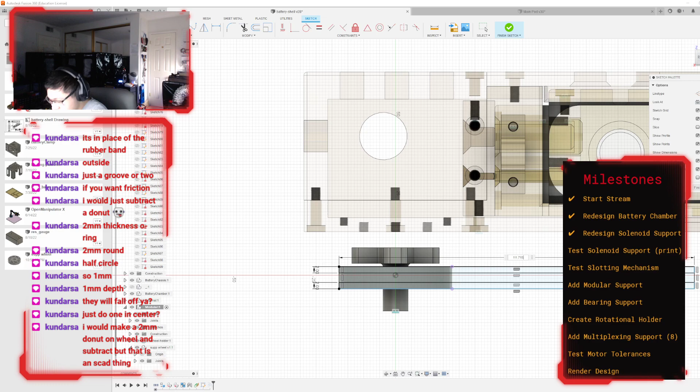Let's try 7.5. Just add a little piece on the back here.

Why did it move? I don't know why this remained. Self-intersecting body. Of course it did.

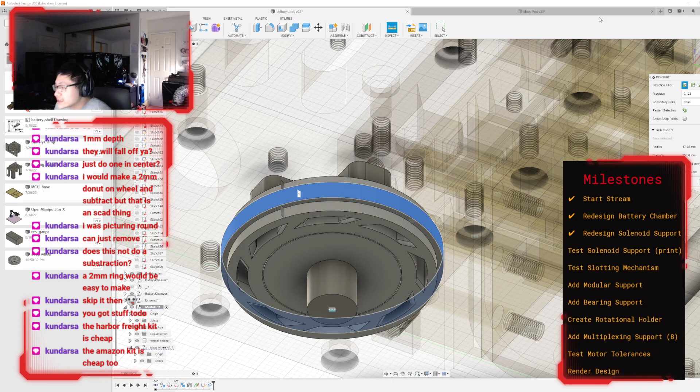Alright, you know what? I'm gonna do the wheels tomorrow, and then tomorrow's Wednesday. I'll do the wheels on Wednesday, and then I'll do the rest of it on Thursday, and then we'll be ready for Friday. And that's gonna be the end of this until fall semester.